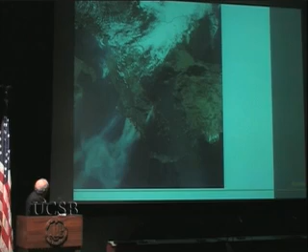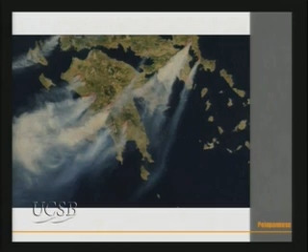In Greece there were very many fires. Here we see a satellite image showing the fires and the smoke, and the area we're talking about is here. Here we see more smoke coming in these satellite images, and again here it shows the areas that have been devastated with fires. It was an amazing environmental disaster.

Talking about fires in California, it is relevant because you also have big fires here. Sometimes people in Greece believe it was the inability of the forces there to put down the fires, so when we see what happens here in California, we are a little more tolerant.

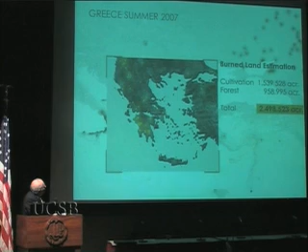Again, here you see all the different lights, this is our area. And these are some statistics - 65 people died because they did not know how to handle the fires. We learned since then. Basically, all the people who died, they died because they left their villages and got caught by fire on the way going from the villages to another village or to the town. Those who stayed in the villages did not suffer at all. However, nobody informed them that they should not leave.

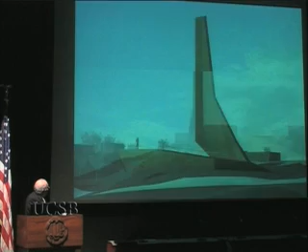Let me go a little faster here. He worked out the details — he wants to make this an observation tower as well, using it as a camera obscura to see different pieces he proposes not to restore. Eventually the tower is going to become part of the village.

Now, this is very strange for Greece. I'm not sure how to criticize it, but I just want to give it to you as an idea.

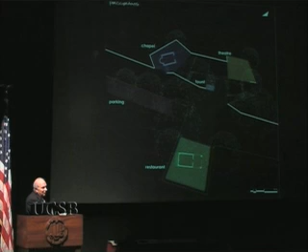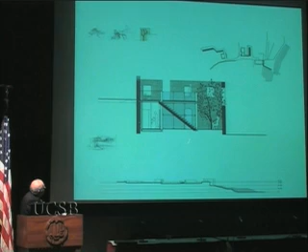Others took burned houses and suggested turning them into walkways, making a steel structure within the burned houses so people could walk through it, making the ruin part of the public space and the public walkways in the village.

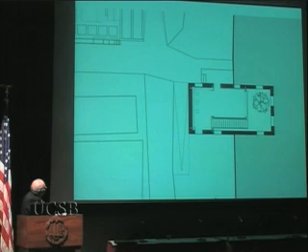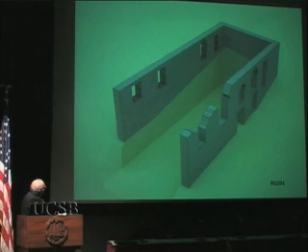Others proposed building hostels, again using a ruin — instead of redoing the ruin, they kept the stone walls and made a steel structure inside, eventually building very modern residences that combine an outer cell and an inner cell.

And others proposed a winery, giving all the different suggestions here for it. This is the winery, you see the ruin.

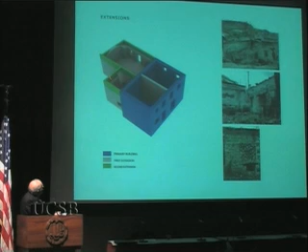But instead of fixing this ruin, which was in terrible shape, they studied the different phases of how it was built. The primary building was this first piece, then there was a first expansion, a second expansion, and eventually they suggested making a winery within this structure, within a concrete structure.

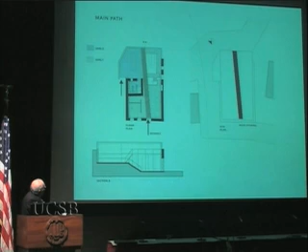Let me go a little faster here. Eventually they put all the wine production inside this building, leading to a structure like this, all built to specifications and based on studying the wine production of the area.

Then others suggested to keep the shell from the outside. Actually, this is the house that they're rebuilding, and this is next to another burned house.

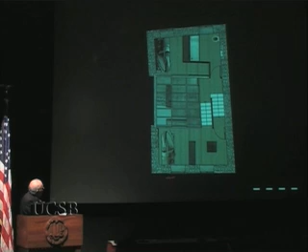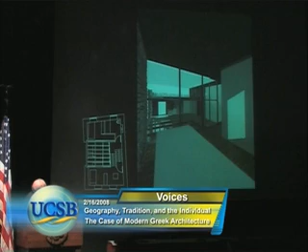Here we see a plan, using stone on the outside, but making the interior a very compact space with different levels. Stone is kept on the outside and rebuilt, but even if you rebuild the exterior, the interior is all very different - it's a compact house following a very different architecture.

That was actually one of the few projects that suggested rebuilding the exterior. Then we continue with more - this is a youth center, another ruin. This is the situation of how things are. There's a lot of trash outside right now and cars like this. This person documented this building - this is the roof, this is actually the upper side of the roof.

I'm going to go faster to show you what this old oil pressing Eleotrivion is. Look at all this crap which is there right now. This has not been working for 20 years, so it's not the fires - the problem is much bigger than the fires.

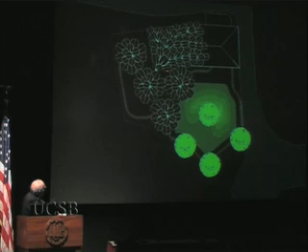He suggests to do something of this nature and to restore it and make it a youth center for the youth of the area. He's using this kind of artificial plants, and these artificial plants are standalone, and also they're covering the roof. Then he's using a belt that goes inside and out.

He paints everything in bold red, works out the plan, and eventually this is the proposal - using the old oil presses for bookshelves and using the back of the room as a stage for music, in an effort to keep young people busy in the village.

There is always an issue on how we can do new residences, and Pavlos did the new residences. His idea was that because of telecommuting and using the computer, people can work there, and he believes that everywhere in the whole countryside we can have people working, and basically all over the world.

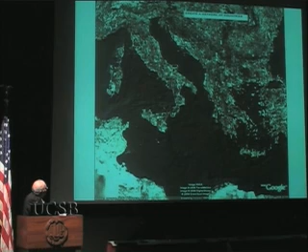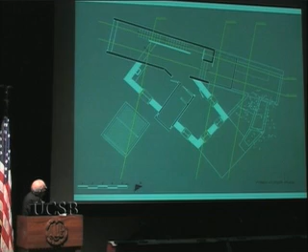So he's taken the map and put many red dots, and studies the traditional typology of buildings. He adds additional usages like parking, working space, vertical movement, kitchen, bathrooms, and eventually comes with a particular style, which I'm going to show you very quickly.

Eventually he places this new building on the village, on the grounds that we will need to build new, and the new should not be copies of the traditional buildings. That was half of the exercise.

There is a bigger problem in Greece: the public policy does not allow the development of new towns. As a result, the old towns are being expanded, trying to accommodate people who leave the villages.

So what we see is Kefalochoria, or the head towns in the area - Zacharo is one of those, or Kyparissia in the area we're talking about - that grew from small villages into much bigger ones. We believe this is wrong. At the time that we do new towns all over the world, especially recently, because there is a need for new towns for the quality of urban life.

We see Korea and Saudi Arabia and other parts of the world doing this in order to provide better towns than the ones that already exist. In Greece, it's really wrong that we do not do that.

So one of the exercises for the students was to think and design a new town, on the excuse that villages like this are subject to landslides that are going to destroy some of the houses. So there is a real need, but that was only the excuse.

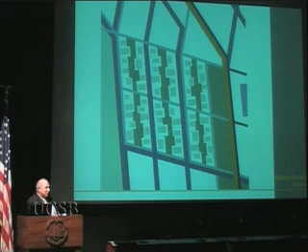Here we see the master plan of some students who thought about the different networks, the different settings, and proposed different ways of development, criticizing the polykatoikia of Athens and trying to give a more human and better quality of life approach.

They looked at low density and medium density options. The student from China, actually from Harvard, really impressed us with how well he understood the issues of town planning. One of the exercises was that the new town should be on a slope, not a flat area, to make it more relevant for the Greek landscape, but also more complicated.

This is what he did. He started with the contours, then developed computer models with the help of a Greek professor at Harvard who teaches algorithmic architecture, Kostas Terzidis. He started moving the contours, doing the grid in real-time computer simulations.

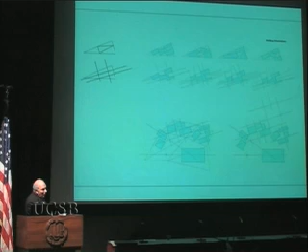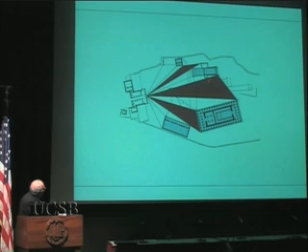Eventually he proposed a three-town development, very similar to what we see in Sifnos, with different villages, one a little further from the other, studying the different assemblies, trying to imitate how the villages he visited were built, and avoiding the square grid. He said he was inspired by the Acropolis and Olympia, looking at the different angles among the different structures.

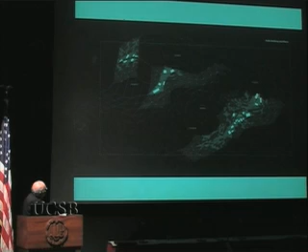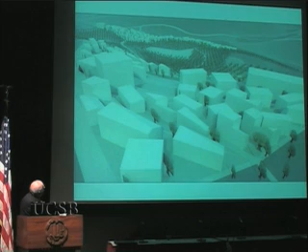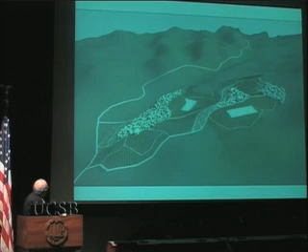Eventually he developed things like this, showing different public and private spaces. He planted olive trees all around, so this is all immersed in olive trees. He produced some three-dimensional structures showing this new land development, which follows rigorous approaches - studies of sun and shadows, cross-sections - and eventually defines the urban center, where he unifies several of these buildings as one to provide indoor and outdoor space.

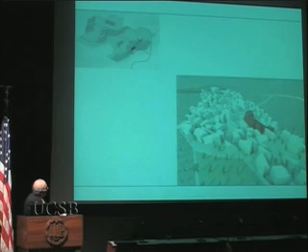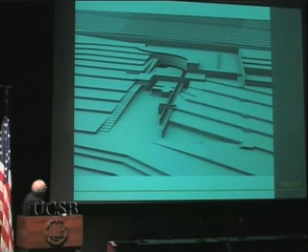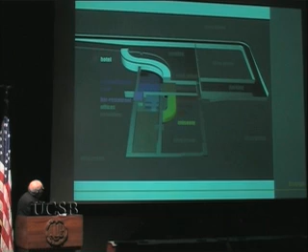At the same time, the students started thinking about how to make the area more attractive from a tourist point of view. One student proposed an olive museum, an olive park, starting with the olive ideogram and making it part of the building, creating tourist attractions so tourists can go not only to the sea in summer, but also start thinking about winter tourism.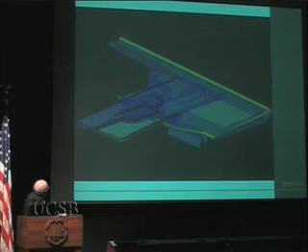She says she wants to pursue this even professionally. Another student observed that cemeteries were basically everywhere, and she started criticizing the cemeteries and churches, deciding to design a new church. She talked with the priest, understood the procession, and wanted to make a church with a cemetery. Here I show you some images, and eventually these are the graves - that was the work of the students I wanted to show you.

Now, what really impressed me was that the work of the students was very different than what I was expecting. I was expecting to see traditional work - stone and wood - in a way that would look more like Monemvasia.

And I was expecting to see how they can correct the concrete buildings that were there. I presented this to you as an experiment and laboratory to see what is coming. In a way, what Yorgos showed us before with the new architects, Aggelidakis, Antonas and others, is not very different. We see that Greece is very much part of the international scene, and although if you go to Greece, you may not understand you are in Greece other than with other signs.

Someone asked that question yesterday. I believe it's going to tell us about what it is, but definitely this is something we have to watch out for. These are 19, 20 year old people, very talented, and this is how they wanted to express themselves. I don't believe it's the role of the teacher to tell them what to do. I believe the role of the teacher is to get the best out of them and then criticize their work. Now, if they had to do professional work, I don't know if that would fly.

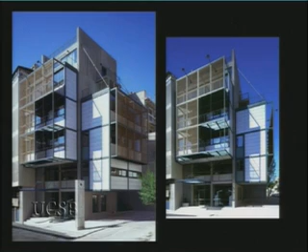The high-rising volume of a monastery with wooden, smaller projected units, and a contemporary comment. The basic prism constitutes the core of the design and carries suspended the metal volumes of an office building in Athens.

There is the core, the concrete core, and those are the metallic suspended volumes. Design, I think, is here, it's more easily understood.

The metal grids and the wooden blinds complete the two facades and define two zones, creating an open-air transitional space between the interior of the offices and the city, protecting the working space from the sun, as it was usually done in wooden constructions.

The same result with the brickwork, a transparent wall protecting from the sun and letting the air flow freely. And some attempts to work with brick today and unplastered concrete. We try a lot to think about the texture of different materials and how they will react under the very strong Mediterranean sun.

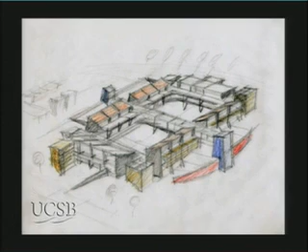An archetypical space arrangement, a school organized around a patio, a sketch, and the school completed by 2004 near the city of Patras, photographed from a helicopter.

An introvert building. The yard is the heart of life of the school, the open yard. Those are the classrooms given to this area.

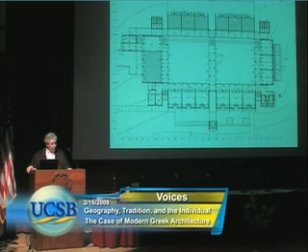Actually, everything is organized around the void. The individual is part of a group, the class, but all groups refer to one another, look to one another, forming a coherent whole.

Details of the same building, the use of bare concrete.

The school from the ground level. This is near Patras, and this is the bridge connecting the Peloponnese with the mainland.

The entrance, over there. The big hall of the entrance, used as a multi-purpose hall, with the wooden structures that protect this area from the sun.

The yard inside yard with a portico that surrounded it, another archetypical arrangement.

The northern part of the building, that's why it's in the shade, because it's north, with large openings,

and the southern parts, which is more exposed, with a wooden structure protecting the classrooms, and some areas used from the classroom for open space lessons.